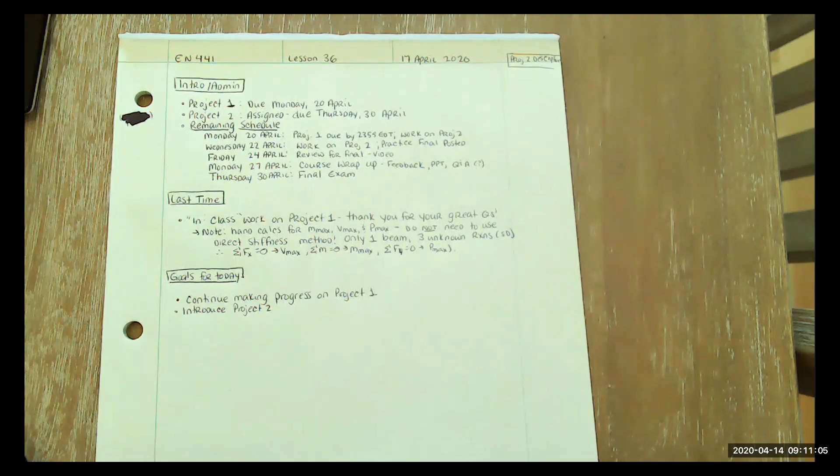And then again, Thursday, I'll give you as many details as I can about the final exams as they become more clear. Last time, again, it was a short video, time to work on Project 1. Thank you to everybody. I've had a lot of great questions via email and on online office hours. So, keep up the great work.

As a quick note, make sure that when you do your hand calculations, all you need to do here is a statically determinate cantilever beam, summing the forces in the x direction, y direction, and then summing the moments about the base of your pile, so that connection between the ground and the bottom of the pile.

You do not need to do the direct stiffness method to calculate Vmax, Mmax, and Pmax. If we had wanted to use the direct stiffness method, we could calculate deflections at the end of the beam, but for this problem, that's not a requirement. So just please don't hesitate to let me know if you have questions about that.

Again, goals for today, just keep working on Project 1. I'll go ahead and just talk briefly through Project 2. I'll pull up the project assignment and an example and sort of consider it assigned today, but again, not due until the date of the final exam. So let me go ahead and share my screen. And here's Project 2. I'll post this in the same project folders under a new folder for Project 2.

And I think this will be hopefully a really kind of fun way to think about how some of the simplifications we make in class are much more complicated when you think about real offshore structures, and also to investigate a little bit about how offshore structures maybe are designed, how they're subject to different environmental loadings, etc.

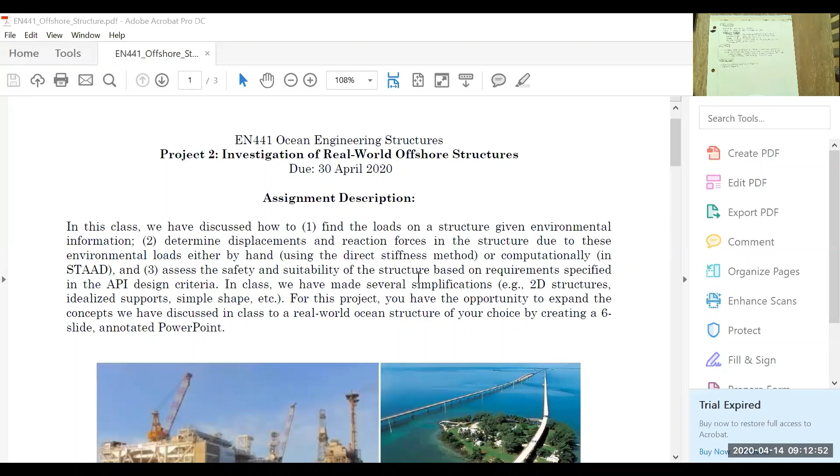So again, in this class, we've talked about how do we get the loads given environmental information like wave heights, wind speeds. How do we find displacements and reaction forces? So we can use either the direct stiffness method, or we can use something like STAAD, a computational program, to do those matrices for us. And then how to assess the structure's suitability and safety based on things like design criteria. And we specifically focused on criteria from the American Petroleum Institute, but there are definitely other standards out there that are applicable to many other structures.

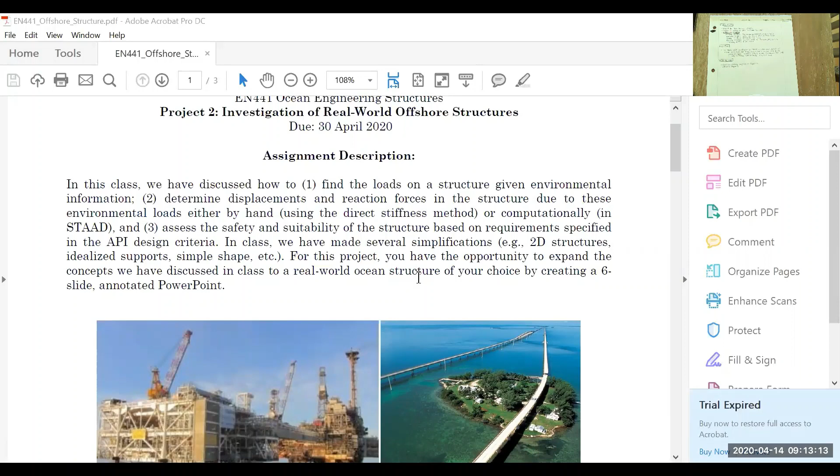For this project, I'd like you to choose a real world ocean or coastal engineering structure and kind of go through just a very basic process of thinking about how some of the concepts we talked about in class relate to this structure. And again, you can make a lot of simplifications.

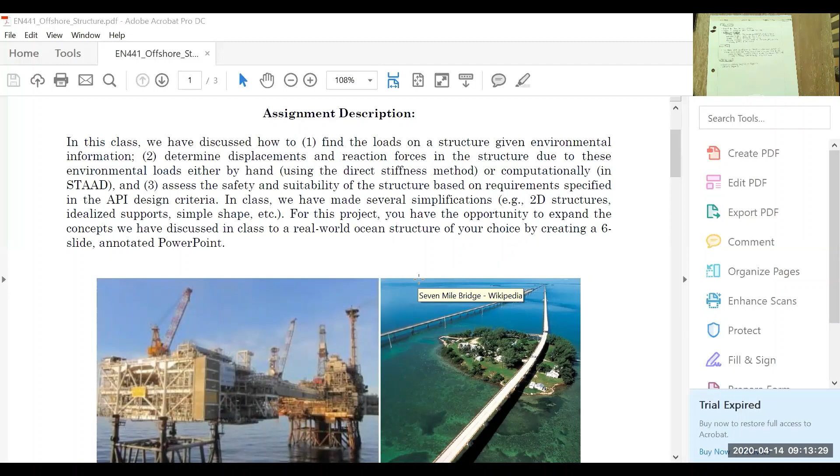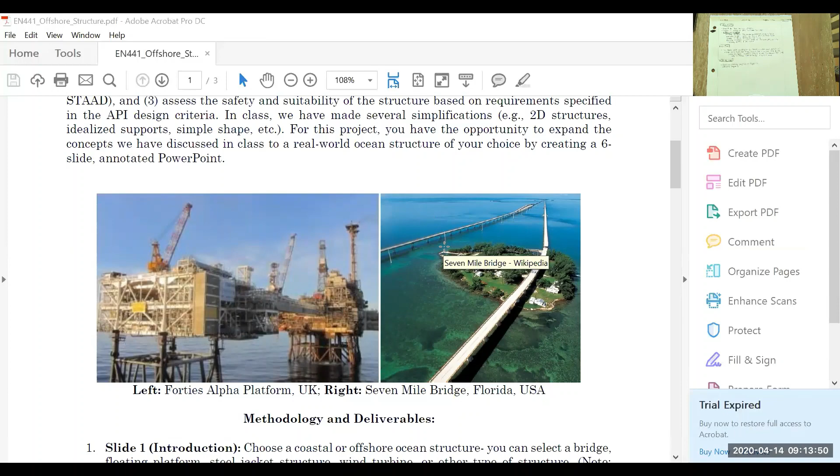So for example, here's just two ocean engineering structures, one from the United Kingdom and one from Florida. If I were to choose this coastal bridge, it would be totally fine to just say, I'm going to isolate this pile system like we did for Project 1, and say, I'm going to really focus on the loads on one pile. And you can assume that those are consistent along the entire length of the bridge.

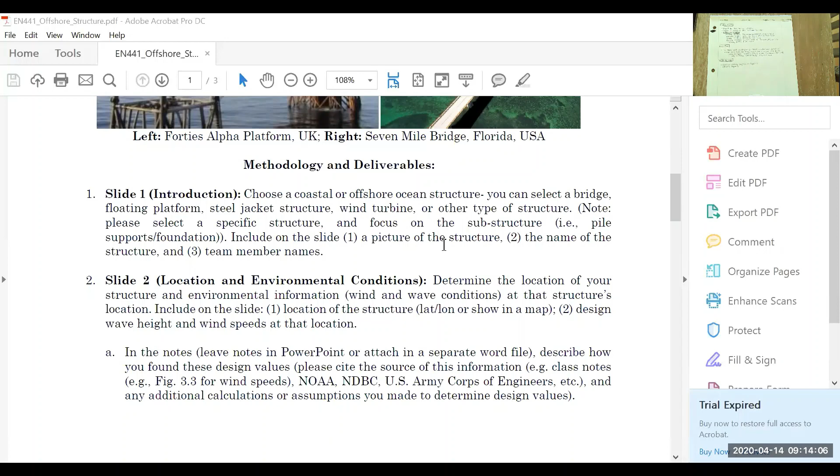In terms of the deliverables, I'd like you to submit a 6-slide PowerPoint with some supplementary documents, some supporting calculations that you can submit either as a JPEG of handwritten calculations or a PDF of typed up notes, whatever works best for you. But for the PowerPoint, slide 1, just give me a picture and the name of the structure. Slide 2, do a little bit of research about the environmental conditions.

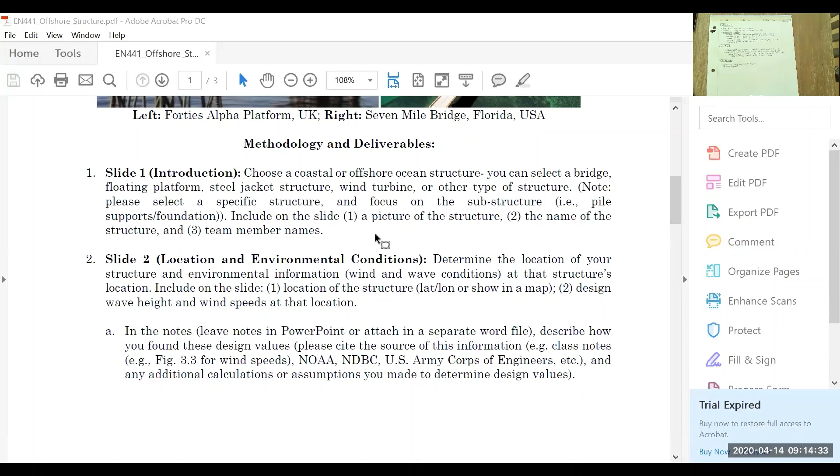Here you don't need to do anything major, like this isn't going to be a site analysis like you'll do for your capstone project next year, but I do want you to maybe have a look and see what information is out there about the location of your structure. So some great resources here are NOAA's website. NOAA has the National Data Buoy Center, which can give really good data on wave information, tides.

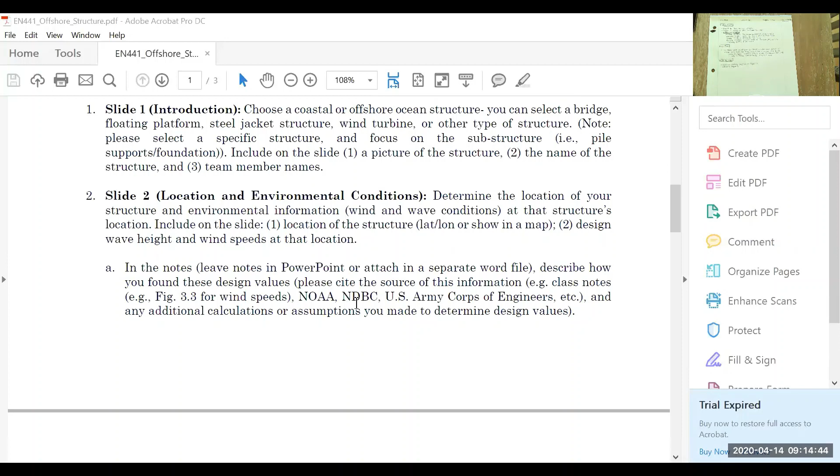Also, the U.S. Army Corps of Engineers provides some really good information about return periods for different wave calculations. And again, you don't need to go through and pull 20 years worth of data. You can just look at the last 5 days worth of data and then maybe add a safety factor that you think is reasonable.

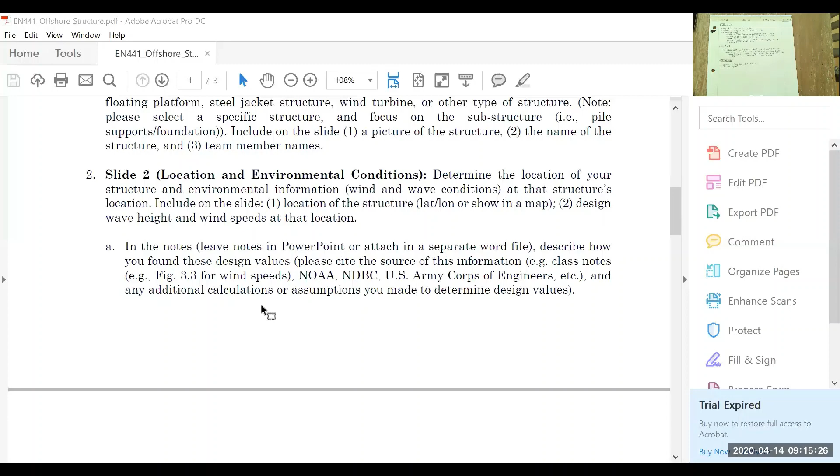And again, as long as your assumptions are valid here and you clearly state why you're doing what you're doing, I'm very flexible with these calculations for the design value, because a lot of that comes down to engineering judgment. So just take some time to think about it, but you don't need to spend a ton of time pulling data, analyzing data, or looking for things like that.

Slide 3: based on the environmental conditions that you decide in slide 2, I would like you to do some calculations for a 5-foot pile diameter, assuming there's a water depth of 50 feet and that it extends 15 feet above the still water level. So this is more of just a little bit of practice for the final exam, working with how we can calculate the wave and wind forces, assuming we know all of the environmental conditions.

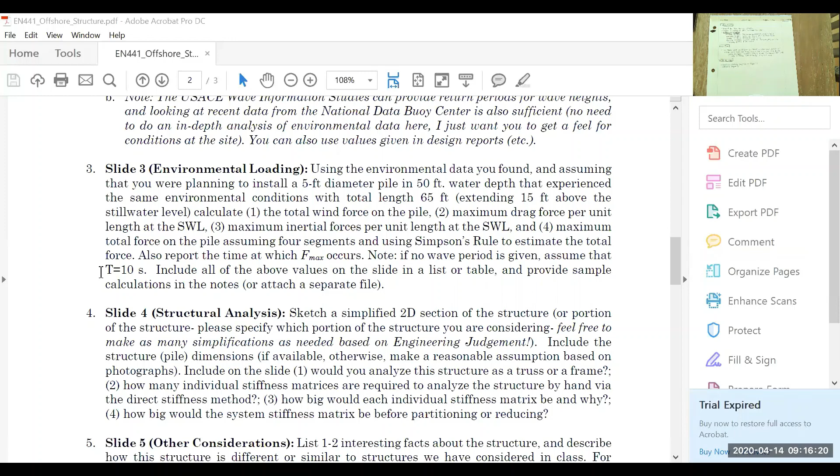And I think your spreadsheet for project 1 will be very helpful because I'm asking you to calculate the total force at the time of the maximum wave force on the pile, so the force at the time when the maximum wave force occurs. As a general note, a lot of times it's hard to find wave period information. So if you don't find that easily, go ahead and just assume that your period of the waves is 10 seconds.

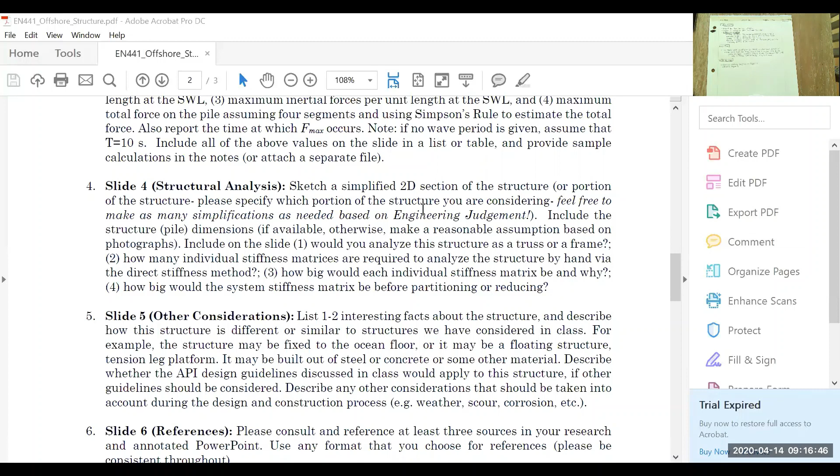And this is up to you to determine what you think a good simplified cross section of your structure is. So whether that's just one pile, a pile connected by a brace to another pile, sort of like a 2-pile system, or even more, maybe there's a truss system on an offshore structure. Up to you, just show a sketch on the slide of what you're analyzing, and how you're getting the numbers for these questions.

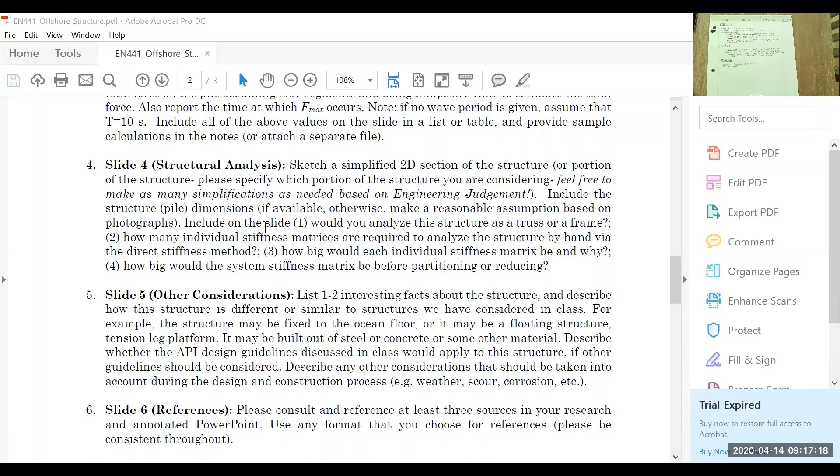And then slide 5 is just any other interesting thing you think about the structure. So please have some fun with this. And also think about how it's different from the structures that we've simplified in class. Basically the biggest difference is all of these structures have a lot more complicated things going on, complicated connections, real world uncertainties. But also there's some cool things.

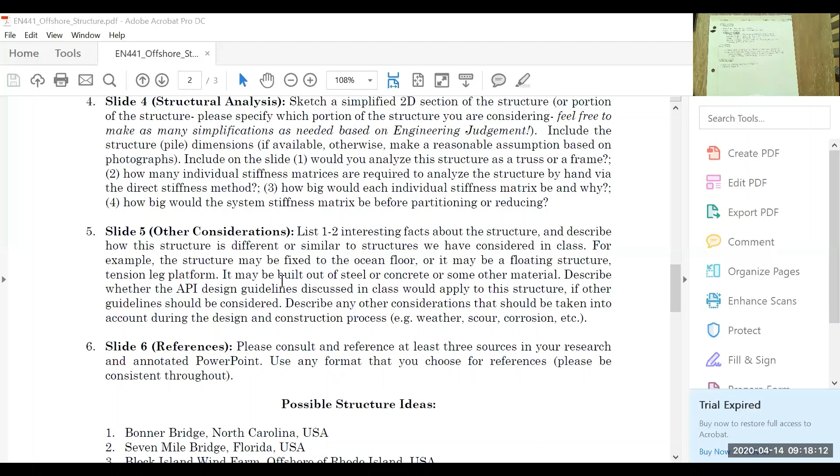All the structures we've considered have been fixed to the seafloor or fixed somehow. So you might see that there's different ways of mooring offshore structures. There's new floating structures, something called a tension leg platform, which is pretty cool. And also feel free to go beyond. We've used steel, I think, for all of our monopiles, but a lot of ocean engineering structures are not built of steel. So feel free to check out what the material type is and things like that.

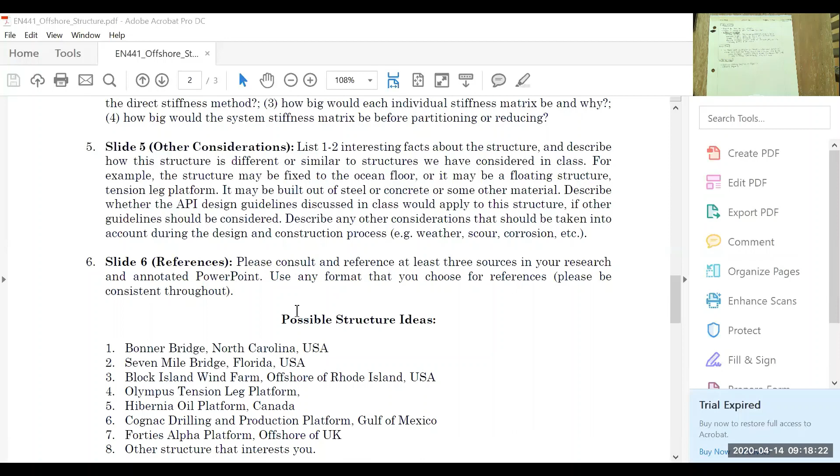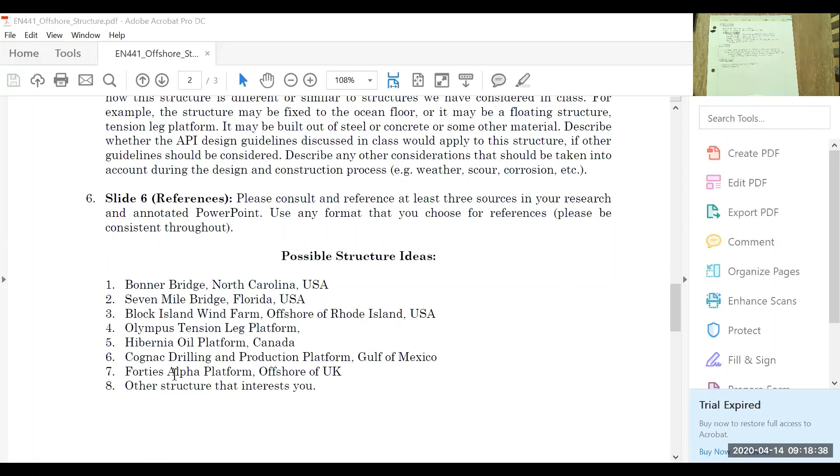And then please let me know where you found your information, just cite your sources. I'd like you to try to find at least 3 sources. They can all be online sources. Obviously, we're working on our computers these days. I listed some structure ideas. This is a very incomplete list. So go ahead and find something that is cool to you, interesting to you, maybe near your house or near where you are right now. And then just the assessment information.